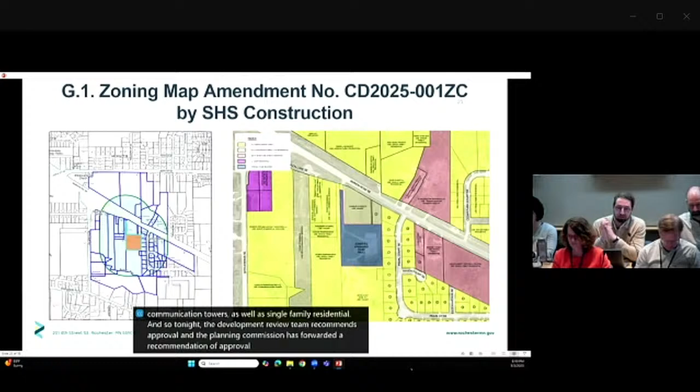Thank you, Mr. Mueller. Is the applicant here? Please step forward, and you have 10 minutes.

Good evening, my name is Vanessa Hines. I'm an engineer with Widseth, and I'm here tonight representing the applicant. We're asking for your support in this zone change. This is the last step in the process. We went through the land use plan amendment process, as Elliot had mentioned, and now are requesting the zone change. We're happy to answer any questions you may have, and again, we ask for your support.

Thank you. We'll call you up after the public hearing. This is a public hearing. If you wish to be heard on this item, please step forward. Seeing none, I will close the public hearing and invite you back up to address any other aspects to your application.

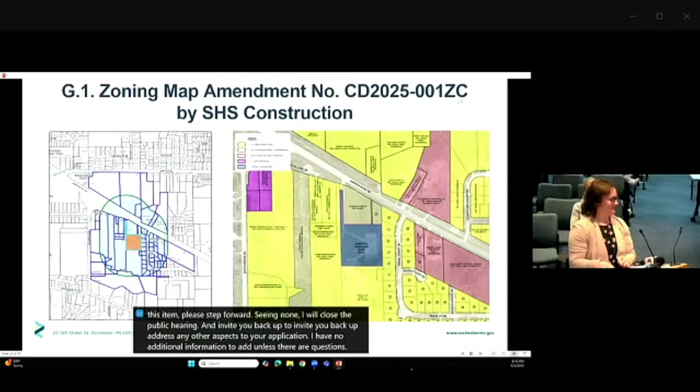I have no additional information to add unless there are questions. Councilmember Keen: I just had one question. Is there a residential property on this property right now? Response: There is not, no. There's a residential property just to the north. Councilmember: Okay, that is not part of the zone change. Thank you.

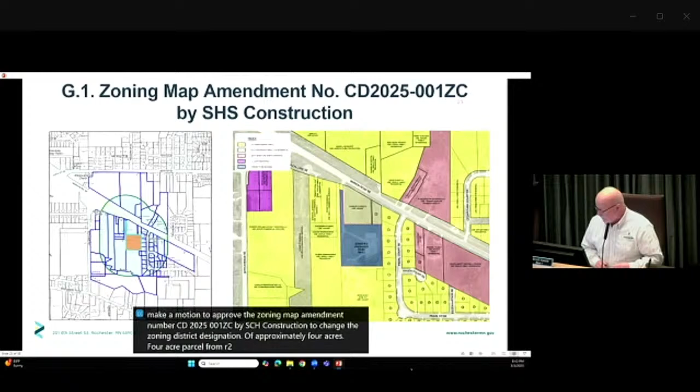Any other questions from council members? Seeing none, is there a motion on this item? I'll make a motion to approve the zoning map amendment number CD 2025-001ZC by SHS Construction to change the zoning district designation of approximately 4-acre parcel from R2 to MXC. Second. Moved by Councilmember Keen and seconded by Councilmember Fredericks. All in favor say aye. Aye. Opposed say nay. Motion passes.

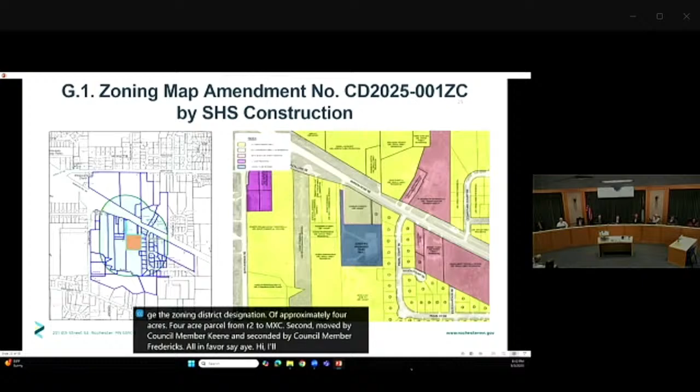Moving on to our second public hearing, which is a vacation petition by Stack Downtown Investments LLC. Mr. Mueller: Good evening, President, Mayor, members of the council, Elliot Mueller, Rochester Community Development, here to introduce CD 2025-001VAC by Stack Downtown Investments LLC.

The site of the vacation is located between 9th Street Northeast and 8th Street Northeast and west of First Avenue Northeast. The request tonight is to vacate a 15-foot wide alley right-of-way within Block 33 of the Northern Addition subdivision. After reviewing this, it would further the policies of the comprehensive plan because it would aid in the redevelopment of the site at large.

Stack Downtown Investments LLC owns all surrounding properties of this alleyway, and their plan would be to combine all the properties for a future housing development. When we look at these vacations, we're making sure that they're in the public's interest as well as them not denying legally required access.

The Development Review Team found this vacation to be both in the public interest and to not deny any legally required access. The Development Review Team is recommending approval with one condition, and the Planning Commission forwarded that recommendation of approval to you tonight, 7-0. I'll answer any questions you might have.

Thank you, Mr. Mueller. Is the applicant here to address this project? Please step forward, state your name, and you have 10 minutes.

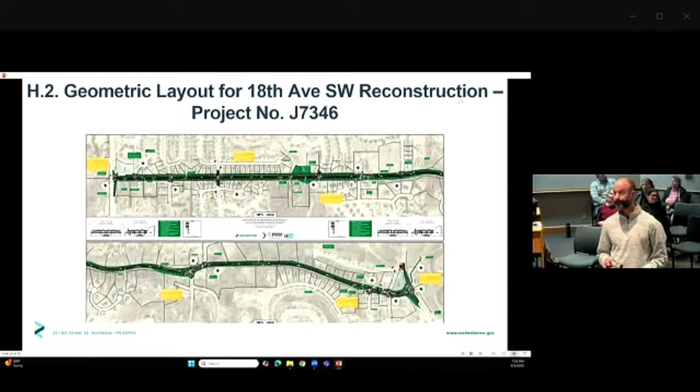Anyway, we're here tonight, obviously, to present the progression of how we've gotten to where we're at on the 18th Avenue Southwest reconstruction project. Project limits are obviously from Mayowood Road at the north end to 40th Street Southwest on the south end of the project.

Tonight, want to talk about the goals of the project, the engagement we've had to date, scope of work, cost, schedule, and then leave you with the recommended action that's in the packet.

So a little bit of background on 18th Avenue. This is a county road. It's always been a county road, and as the city has grown and developed, it's a corridor that has changed in land use and the types of users. Being that it's now turning much more residential, it lends itself to be an urban street versus what it essentially is, a county highway, with a 45-mile-per-hour speed limit today.

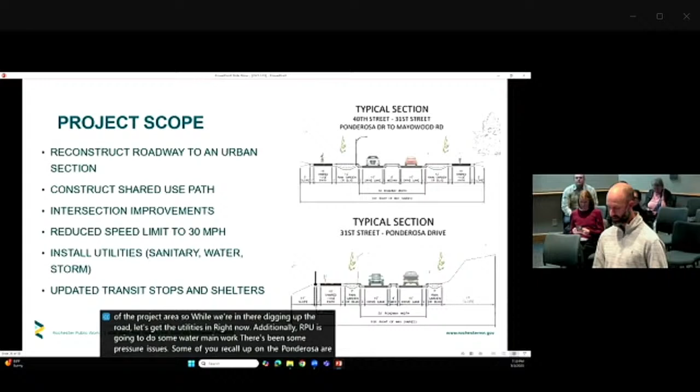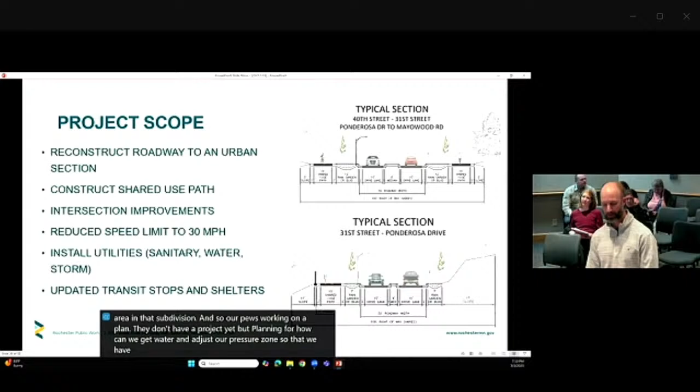Additionally, RPU is going to do some water main work. There's been some pressure issues, if some of you recall, up on the Ponderosa area in that subdivision. So RPU is working on a plan - they don't have a project yet, but they're planning how to get water and adjust our pressure zones so that we have adequate pressure in those areas. So we will also be including the water main underneath the 18th Avenue portion of the project, with this project, just setting it up for that future success from a utility perspective.

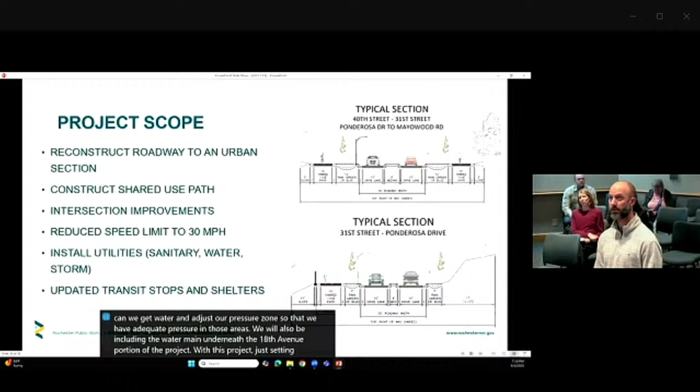And I should have also noted, just stop me while I'm going if you have a specific question on any of the slides. I'll try to fly through these next 5 or 6 just to talk about some of the intersection improvements. We heard a lot about 40th, so this is 40th Street on the left side of the screen. North would be to the right.

If you zoom in and blow that up, we heard a lot about people sitting at that T intersection looking to turn left, heading towards the highway. A car gets in that right turn lane, and it skews your view from being able to see any through traffic, which can lead to crashes. So what we're going to do is offset that right turn lane, sliding those right turning vehicles over so that the car sitting at the stop sign at 40th has vision of any oncoming traffic in the through lanes.

The next two are similar, in that we looked at alternatives as we did our traffic study for how we provide intersection control. This is at Hart Drive and 36th, with Hart Drive to the west and 36th Street to the east. We looked at side street stops, which is what it is today, versus a mini roundabout. The mini roundabout was warranted and will help provide traffic calming and safer crossings for people wanting to walk, bike, or get to a transit stop.

You can see there's a transit stop here, at what would be the northeast corner of that intersection, the lower right as we're looking at it on the screen.

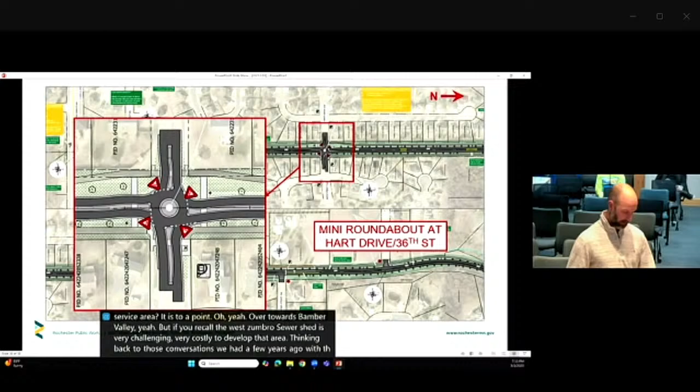Similarly, at Fieldstone Road, very similar analysis, and we came up with the preferred alternative to provide that traffic calming, safer crossings, and the ability to get across the corridor.

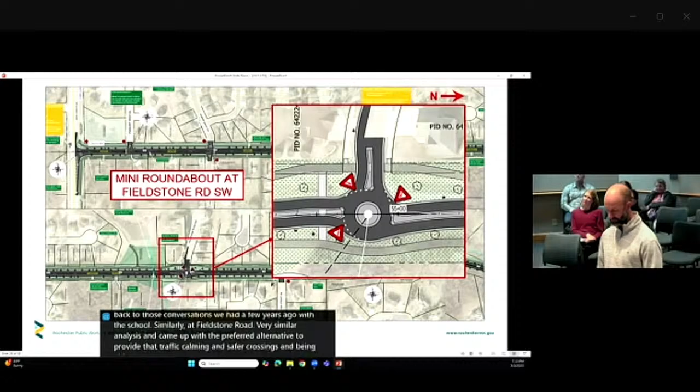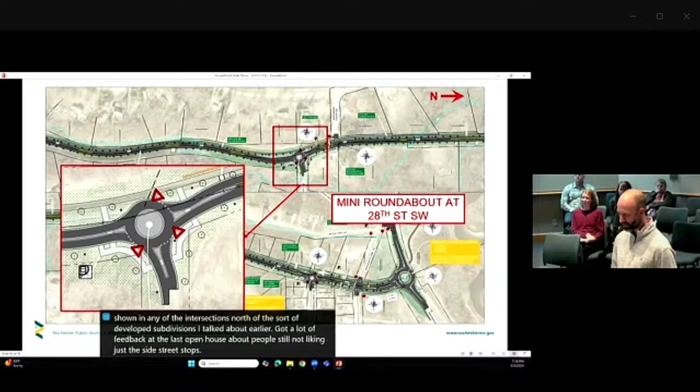So those two were in our first layout that we took to that last open house. We had nothing shown in any of the intersections north of the developed subdivisions I talked about earlier. We got a lot of feedback at the last open house about people still not liking just the side street stops, really worried about speeds. So our team circled back after that second engagement and talked about how we can address intersection control. I'm going to flip through two more.

This one's at 28th Street, and this is where we would get that sanitary sewer and water main to. It's currently a T intersection, it's skewed, and there are a lot of concerns about speeding. Studies show that adding a roundabout within 500 feet reduces speeds by 7 miles per hour, which is really good as it slows people down coming into that intersection control.

So the team talked through it, and we talked about adding a mini roundabout at this location as well, because again, it will primarily fit within the right of way and address those concerns.

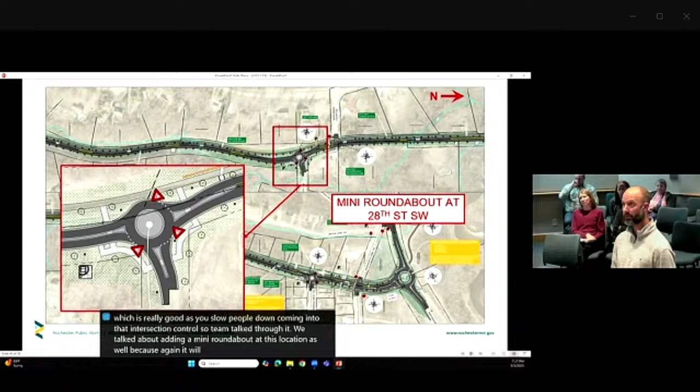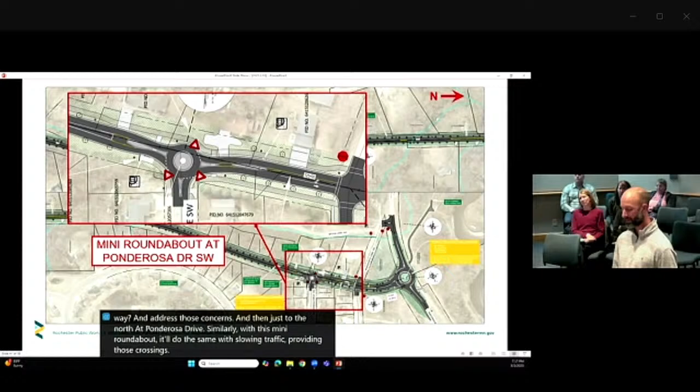And then just to the north at Ponderosa Drive, similarly this mini roundabout will do the same with slowing traffic and providing those crossings. A little bit more nuanced though at this location, we have some homes from when this corridor was first in place and the township was developing, built really close to the right of way. And when we build sidewalk paths in the city, we always put it within 6 inches to a foot from the right of way line.

The feedback was it feels like it's really in our front living room, and it is very tight. They also have driveways, so trying to make space so they can not only access their properties, turn around safely if they want to pull out of their driveway and leave the corridor, and be able to park in their driveway without hanging over the path. So in addition to the intersection control, slowing traffic, adding those crossings, it pulls it away from those front yards, and we were able to pull the pathway and give a little more of a buffer between our facilities. So there's an added benefit with this one at that location as well.

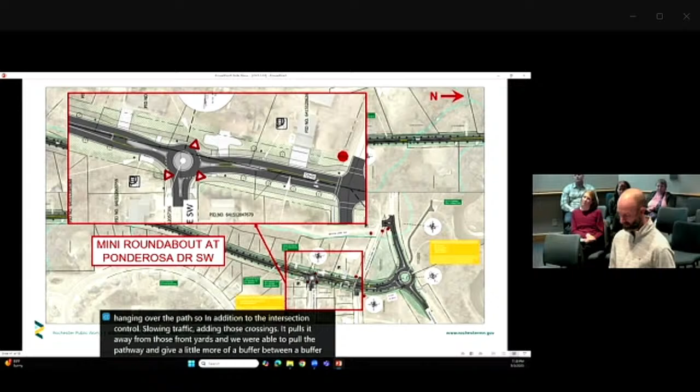And then finally, the last intersection is obviously the one with the high crash history at Mayowood Road and 18th Avenue that we heard about. We looked at not changing anything, doing an all-way stop, a roundabout—this one is a traditional size roundabout—and then a signal system. The traffic analysis showed that the all-way stop or roundabout were warranted, and the signal wasn't recommended, so we're recommending a traditional roundabout at this intersection of 18th Avenue Southwest and Mayowood Road.

You can kind of see it—I don't have a slide—but up at the right side of the page, west of the roundabout on the screen, there is an intersection with Lenwood Road that doesn't meet intersection spacing standards, and Mayowood Road's still a county road. So we're looking at making that a right-in, right-out, such that the cut-through traffic, the complaint you heard about earlier in the open comment—people will no longer be able to do that. What happens is people come north and turn left to try to short-circuit sitting at the T, cutting through and heading west on Mayowood Road. So we'll be making that a right-in, right-out. It will limit the cut-through traffic. People can choose to leave that neighborhood either going back to 18th Avenue and taking a left at the roundabout, or they may just choose to take the right and do the U-turn if they're looking to head west. Otherwise, they can just make the right and they're onto Mayowood Road. So that's one other geometric change.

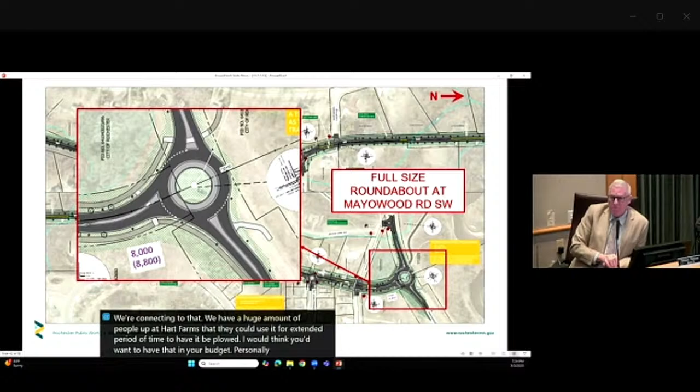South Sumbro, we plow. Yes, we're connecting to that. We have a huge amount of people up at Hart Farms — if they could use it for an extended period, having it plowed, I'd think you'd want that in your budget. I personally would recommend we do that. We'll talk through that after the project's agreement is complete.

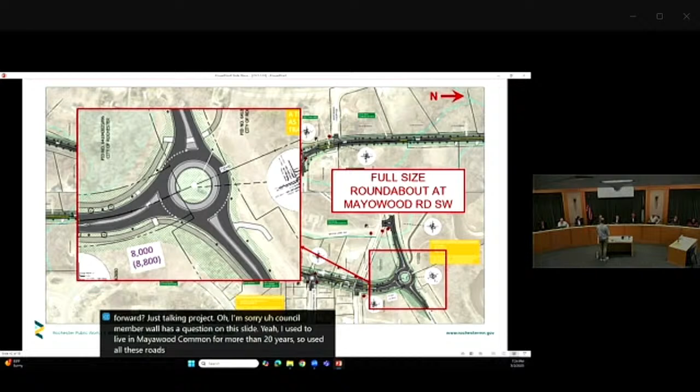On that slide — oh, I'm sorry, Councilmember Wall has a question on this slide. Yeah, I used to live in Mayowood Common for more than 20 years, so I've used all these roads a lot, especially Mayowood Road. And you called that intersection a high crash history? That was always a wonderment, so I appreciate the roundabout.

Coming down off the bridge from 52, though, there were many days a year where it was so slippery that even at 5 miles an hour you'd still kind of slip through the intersection. Will there be more attention to the fact that people won't be able to negotiate the roundabout since they don't have control of their car on the slope down from the overpass?

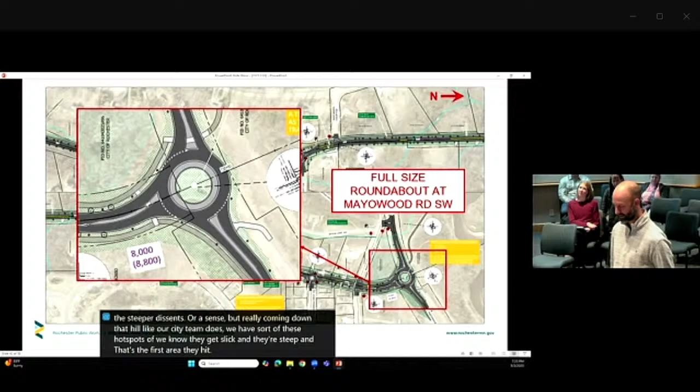Yeah, so as we lay out that vertical profile of the roadway, we're looking at that — how can we improve some of that. We want to make sure you're coming into that intersection flatter than it is today. The county knows that's an area they have to keep an eye on, since it's one of the steeper descents, or ascents, coming down that hill. Like our city team, we have these hot spots we know get slick and steep, and that's the first area hit during icing events. The county's similar, so we work with their team on addressing that, but we also do as much as we can with design to improve that profile.

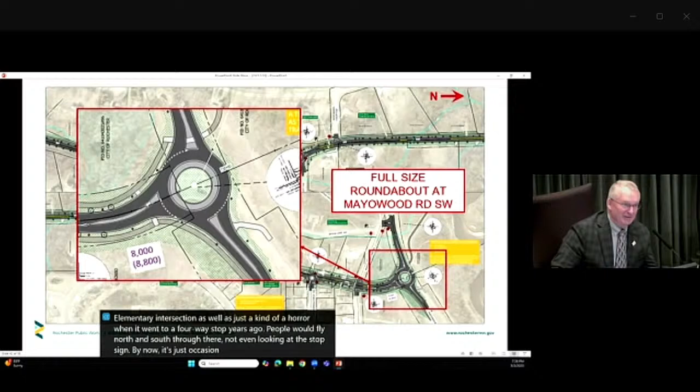I'm certain it's on your radar, but to the west of this, the Bamber Valley Elementary intersection is also a kind of a horror. When it went to a four-way stop years ago, people would fly north and south through there, not even looking at the stop sign. By now it's just occasional, but occasionally isn't good. Yeah, that's also a challenging intersection — those are two county roadways intersecting. Oh, okay, yeah.

All right, I'm wrapping up here with cost and schedule. Project cost is $16 million as our current estimate. We haven't moved into final design yet, but it's changed a little since you first saw this. We've been able to get additional federal funding, both through our Surface Transportation Block Grant Program through the FHWA — that's the money that comes through ROCOG — and we have the '26, '27, and '28 money through ROCOG. In addition, we have the '26, '27, '28 carbon reduction funds through ROCOG, which can be used for all of the paths, connections to transit, anything to help reduce that carbon footprint.

So the federal number is up to almost $9.6 million. The utilities have some cost, and based on the cost participation policy with Olmsted County, we'll split the difference. Our number coming from those reserves has dropped dramatically just with the addition of that federal funding. Obviously we're monitoring where federal funding stands right now, but currently that's what we have programmed for this project.

So just again, kind of where we're at, we had the 2 open houses, we're through preliminary design. We would look at final design occurring over the course of the rest of this year, getting those bidding documents ready for bidding next winter, a year from now, and getting the project kicked off. It would be a 2-year project, so construction occurring in '26 and '27.

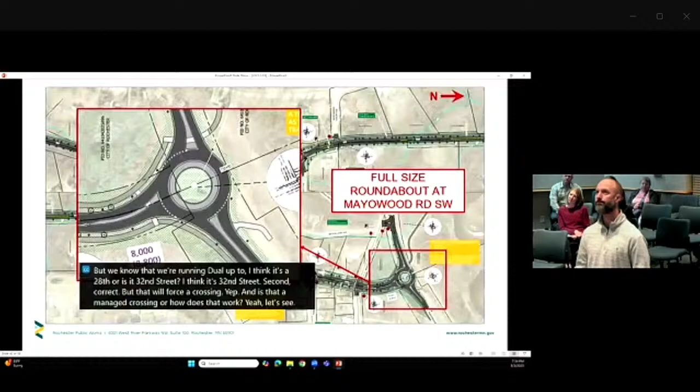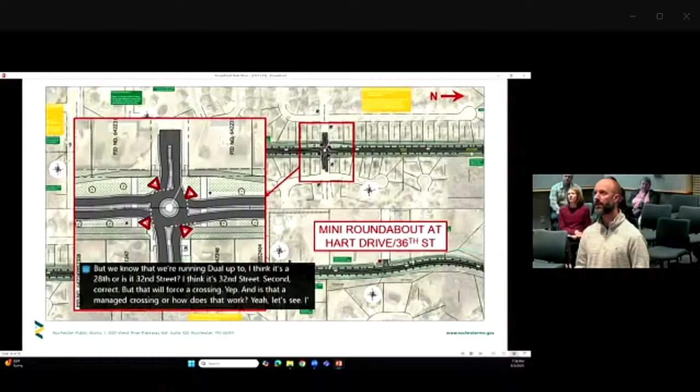Trying to find the best slide—what we'll have there, it's on the larger layout. I think I do have some slides here, you can just talk to it. It'll be a narrower crossing because we're reducing the width of those lanes, and we will make sure we have pedestrian ramps at each corner of that intersection.

You have the median refuge. Okay, that's what I'm looking for. I noticed on the roundabouts there's not a big curve going into them, which is usually another traffic calming design element, but we probably didn't have enough room to do those.

We'll dig into that with final design, and we always like to, as much as we can, introduce some of that curvature to slow people as they're entering the roundabout. This discussion on design for 30 miles an hour, I think it's important, and I'll just say this in a public meeting here, that we have the ability to do that on a city street.

When we're dealing with Mayowood Road or 40th Street, those things aren't options. But when we were working recently, and I think it's a county project, 60th Avenue Northwest, is that going to be a city street or is that going to stay as a county? No, the 60th Avenue corridor is also CSAH 44, so that was recently added to the county's state aid highway list, all the way from 14 up to 75th Street and over to Highway 52.

Right, that's a pretty major crossing, but that's one where I'm much more concerned with because you've got neighborhoods forming on both sides of that. And you've got, I believe we're going to have, is it 45-mile-an-hour speed limits? Yes, potentially 55. I'd have to talk with the county.